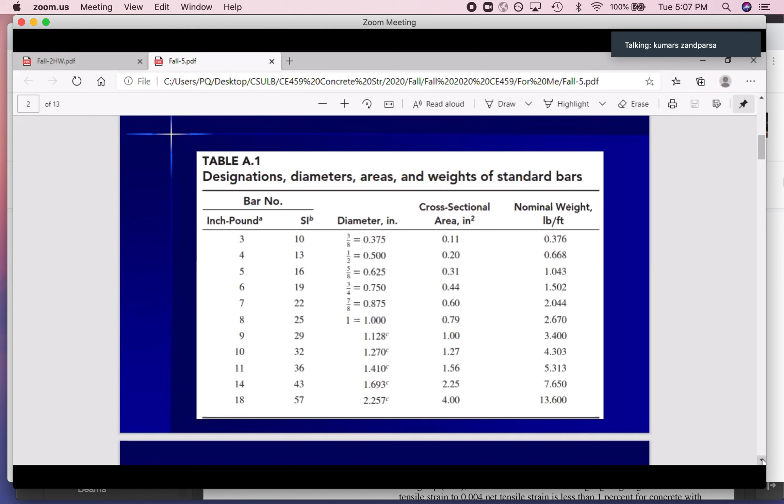Please do harder work. I know you are busy, you have a lot of other stuff, but this is the one you decided to actually work on, so please do it. I will help you.

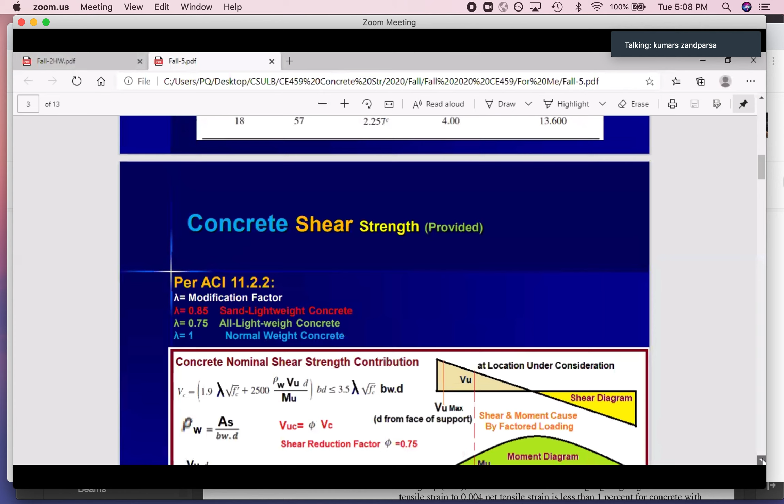I started last week on the shear, and today I'm going to complete this section, and hopefully you can see.

Yes, there is one question. What's the question? When did you say exam 1 will be? Should be next Tuesday. Okay.

Let me read another chat. Yes, these slides — no, I think... let me see. Looks like those are not on Beachboard, and I think you need them.

Let me double check, because I put them up, but if you can't see them, it means I didn't... no, yeah, it's not — number 5, it's not actually visible to you guys. So let me go and make that visible for you.

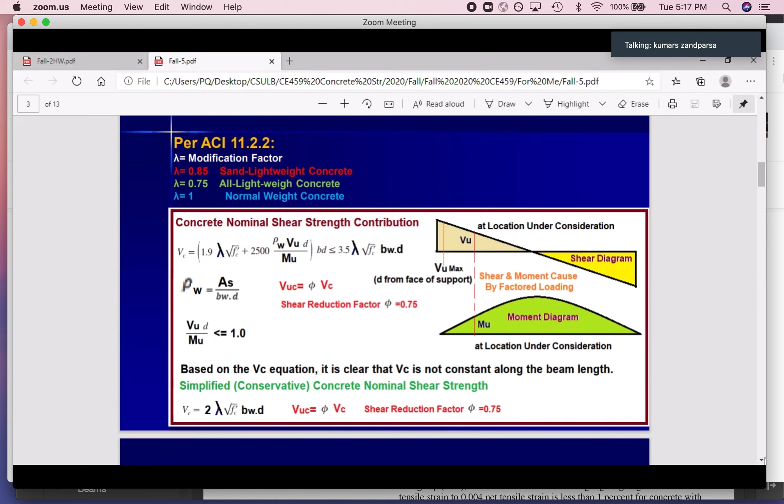But is that good enough? No, we have to do a lot of other stuff as well. Please follow me step by step, and whenever you have any question, stop me. If you have a question, let me know. Otherwise, how do I know that you still have a problem with the first slide? If you have problem with the first slide, raise your hand, text me in the chat, so I will go back and review.

So I have a question. Sure. Is VUC the rebar shear capacity? No, look at this. VUC - VC is for the concrete, nominal.

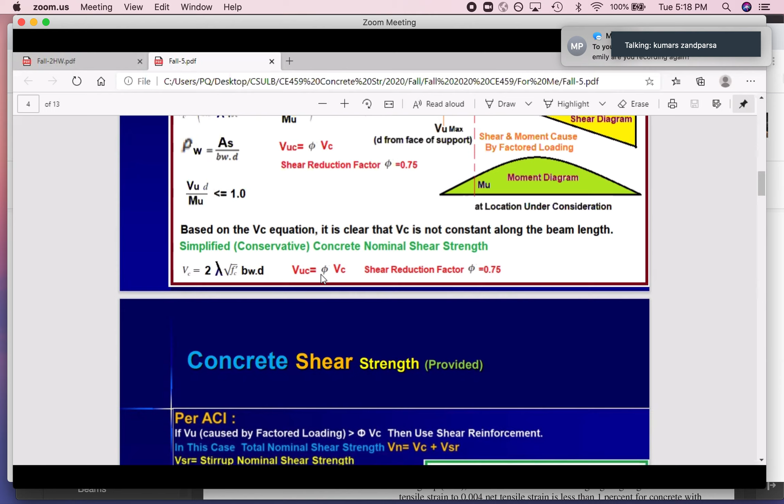Can you remember MN, like MN for a moment? We had MU, this is VU. MN was, MU was the ultimate moment capacity provided by the material. This is the ultimate shear capacity provided by concrete. So yeah, this one is just for concrete. C means concrete. Clear? Okay.

Let's go to this one. Per ACI, we should do something, and you can see always your VU, the shear caused by the factored loading. How can we calculate this? You will see in a lot of examples that I am solving here. So VU is coming from the loading.

VU must always be less than or even equal to phi VC - what was that? VC was the nominal shear capacity of concrete only. Phi VC is the ultimate shear capacity of concrete only. For sure, if VU is greater than that, it means that the concrete by itself cannot tolerate the load, because the shear from the loading is greater than the ultimate shear capacity provided by the concrete.

So what can we do? Then we have to add stirrups. Look at this, this is the beam. These are the stirrups, transferring the shear from here to here. S is the spacing, stirrup spacing.

Sometimes you can see it has two legs. Look at this beam, it has one here. What's the question? No question? Okay, so look at this other beam.

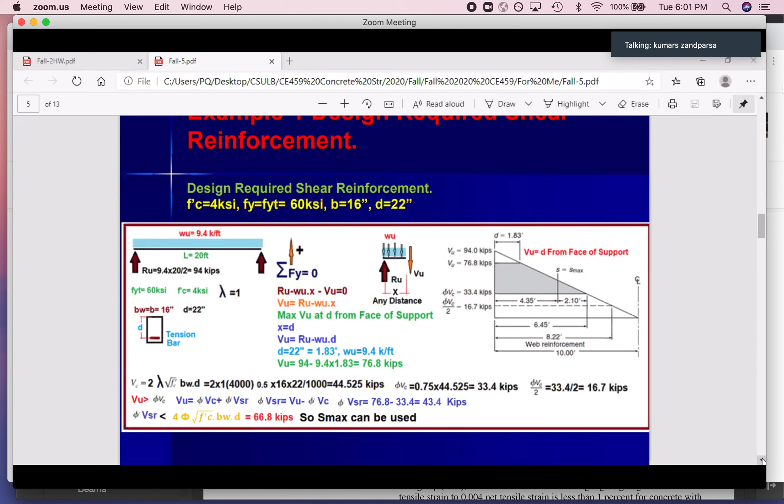Did we assume a phi? No, phi is always 0.75 for shear. So for shear, always 0.75. Phi is not a fixed number for moment, we have to calculate that, but for shear it's always 0.75. Okay, let's continue.

We are not done yet, we know all that stuff. I just showed that diagram one more time here. Just remember, D from face of support. This is our V, this is phi VC, phi VC divided by 2. We got that from the last page.

Then what else can we do? We remember, most of the time, we are going to use number 3 or number 4 stirrups. One more thing for your exam: I'm not going to give you something where you calculate it, and if it's wrong, you have to redo it, because I know that takes a long time. So for the exam that's not a good question. I'm giving you a question where I give you the cross section with the rebar.

I ask you to check if it's good to carry that load or not, so you are checking, not designing. In this case, we are designing. So number 3 is a good guess, and number 4 after that. More than that is too big for a regular beam, not good for bending at this corner. So we use number 3 stirrups with 2 legs. This is our assumption: 2 legs, as you can see for rectangular, the easiest part is 2 legs.

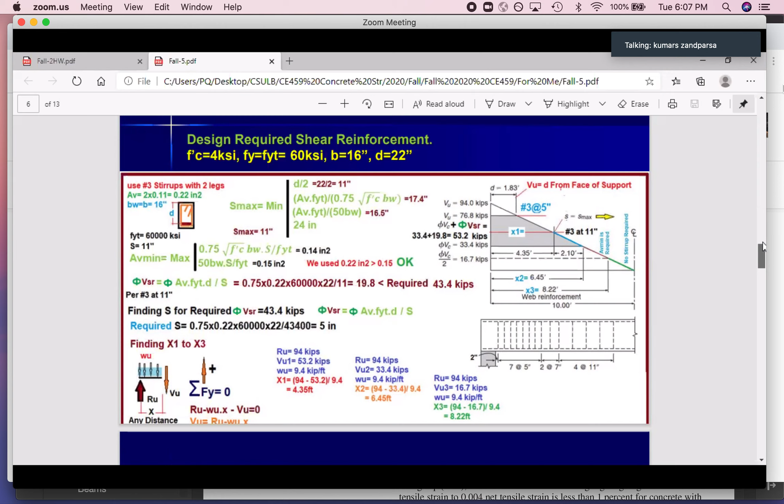And what is the required? The required is the difference between VU and VVC, that's the required. So how can I find the required? One more time, let me see if we calculated that on the other sheet. Yes, we calculated that.

Your VU was greater than VVC. How do we know? Look at this. VU is here, VVC concrete only is here, so it's greater than that. So I can write your VU equals the capacity.

The capacity means Vn times V is equal VVC plus VVSR. Or I can rewrite this based on VVSR is equal VU minus that one. So if I consider VU equal the VU that we have, the capacity for the stirrup must be 43.4. The difference between these two numbers, this number minus this number, means that this part must be captured with the stirrup. Based on the equation, this is the equation.

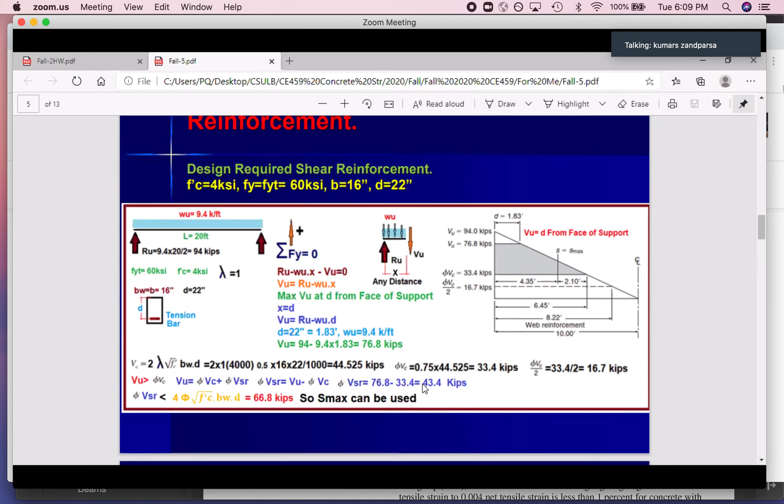Vn is equal Vc plus Vsr. Vn is equal Vc plus Vsr. And Vn is Vu ultimate, and I'm using ultimate coming from the loading to at least be able to get this one. Rewrite this equation based on VSR, calculate VSR, 43.4, okay? So I need 43.4 for this one.

And VSR is less than, this is a requirement, phi square root f prime c bw d, f prime c psi, it's less than this, so 66. You can see 43.4 is less than this. So S max can be used.

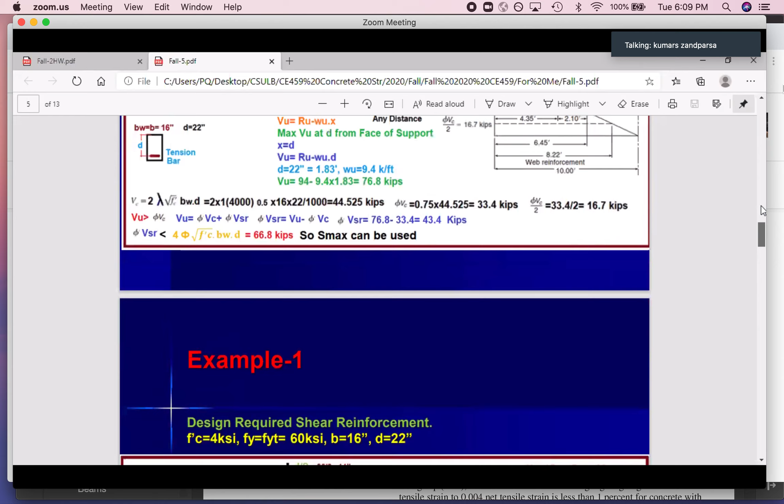Let me go back to the slide we have to see what we are using. I calculated VSR and we noticed that VSR is less than this. In this case, stirrup spacing not more than S max, so we can use S max. If we were in the other case, we should go with S max divided by 2, but we are in this case. So any step we take should be based on the code and result.

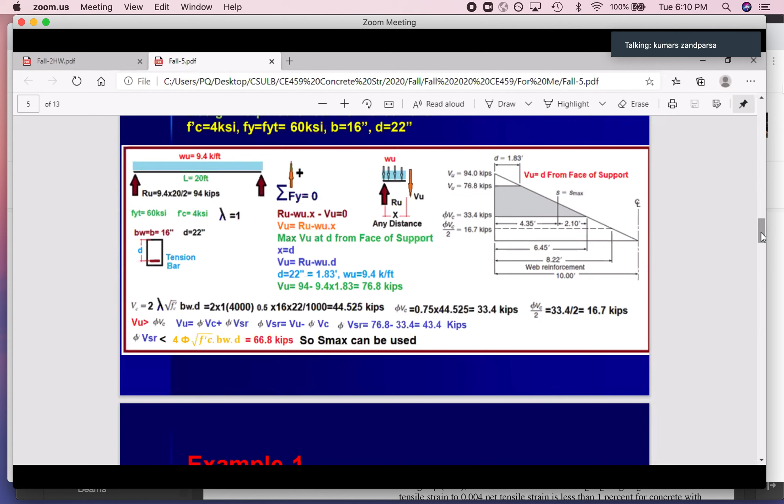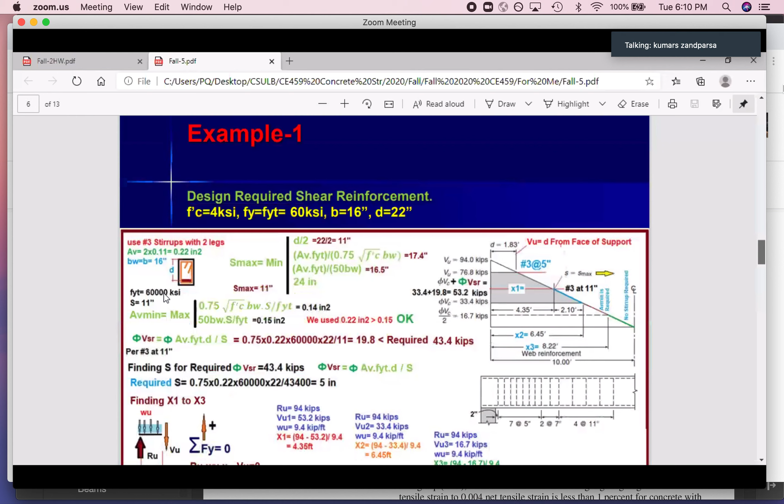What's the question? Did we use the check for AV min, the VVC over 2 is less than VU? Did we already do that? VVC is less than VU. For this example, did we already check to use AV min? So look at this, we calculated AV min based on the S max.

Do you have any question on this one? What's the difference between these two? Because they seem to use different steps. What do you mean different steps? This step and last slide? Like that last slide didn't have this AV min part, we didn't have to find that. So why do we have to find that?

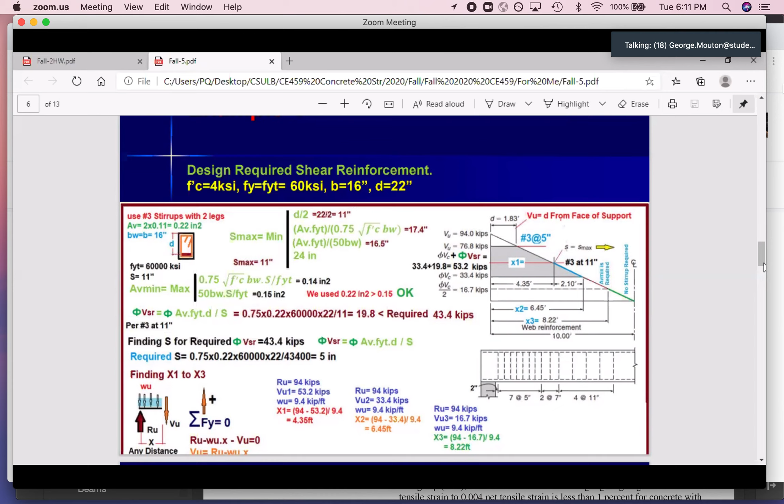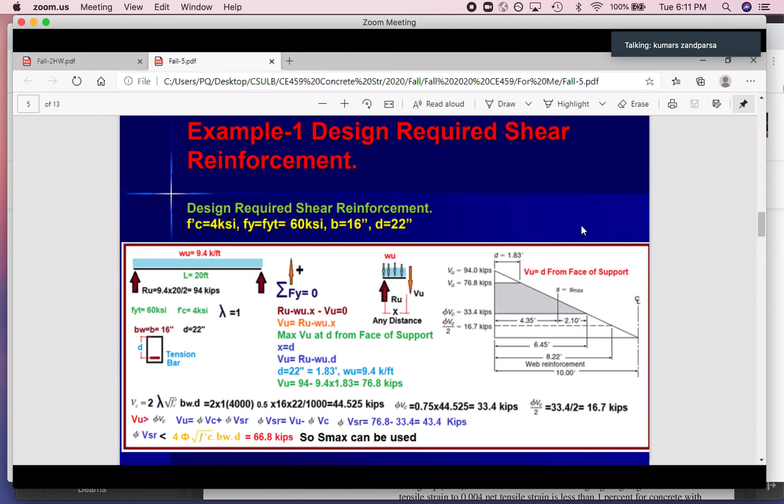No, look at this, look at this. Design required shear reinforcement, this is the example. So we have to go all the way to write the shear reinforcement for this beam, give them the spacing and everything. Yeah, that's the design for shear reinforcement.

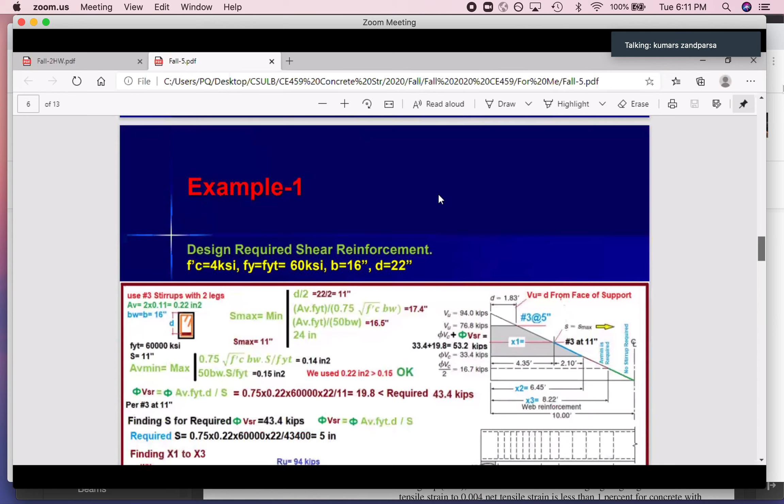So we have to start with this, and still we are following these steps for the same example. We are not done yet because we designed the required—we didn't design yet. Just we calculate the forces and we checked if we can use S max or not. That's it, we didn't find any stirrups and the spacing, required spacing. Just we understand we can use S max, but that doesn't mean S max is good enough for us. Did I give you the answer?

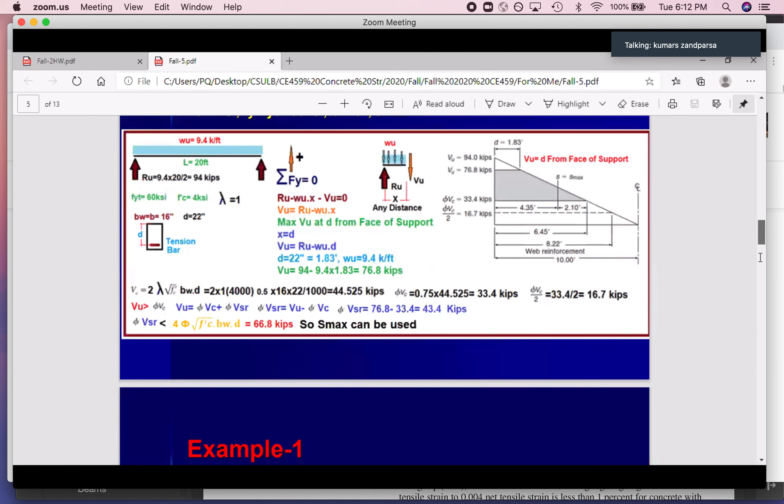Okay, so let's go after this, and hopefully at the end everything should be much clearer. Based on this one, we calculate the VSR based on AV that we use, and S equal S max.

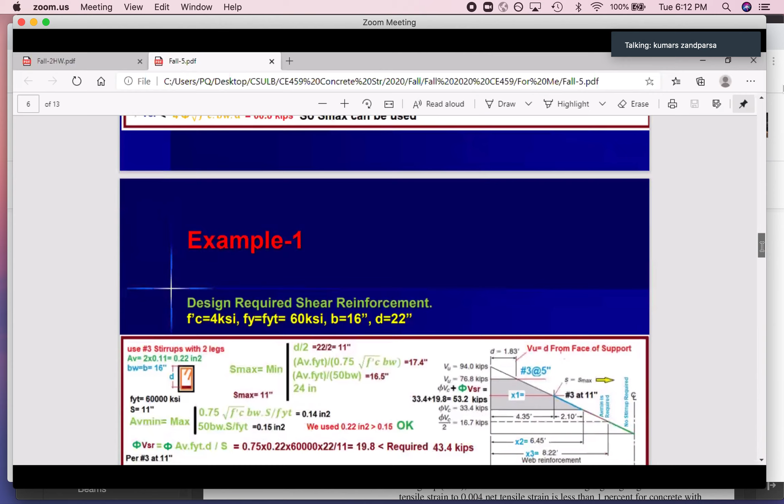As you can see, VSR, if we follow S max, we will get 19.8. But we need—look at it—we need 43.4 kips for VVSR. So using S max is not good for us. Per code it's acceptable that you can use it, but doesn't mean that when we can use it, it's good for our situation. We can use it, we use that, and we calculated VVSR, and only with that spacing we can capture 19.8 kips, but we required 43.4 kips.

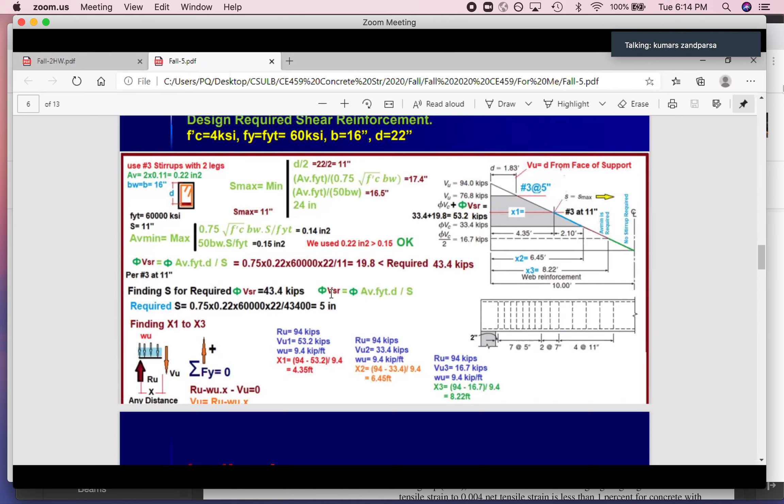But in this case, no, we can't use this. So what can we do? We still can use number 3 stirrups with 2 legs, but the S equal 11 is not good for us. We need a smaller S. How can we use this? Okay, we can rewrite this equation based on the S. I think I wrote that on that slide.

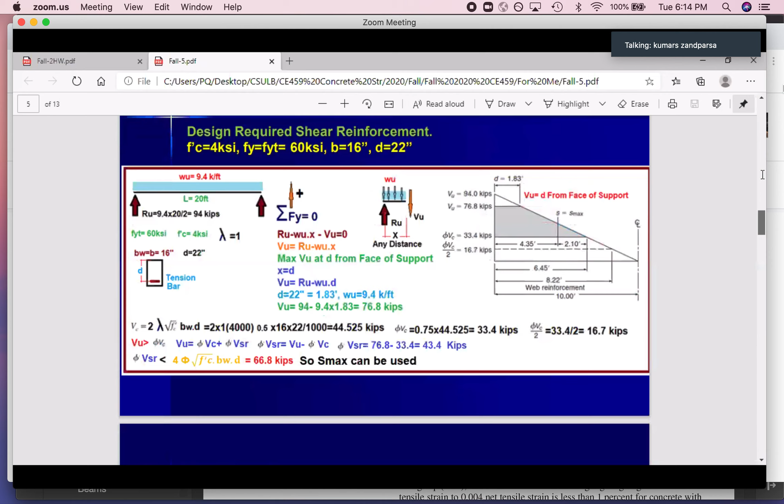I'm not sure if we did that or not. Let me see. That's your VVSR. Where is VVSR? Look at this. That's the equation. This equation, VSR, you can multiply it by VVSR.

So if you want, you can rewrite this equation based on S. S divided by AV FYT. S equal AV FYD divided by VSR will give us S. So you can rewrite this equation based on S. We use this part in order to calculate S.

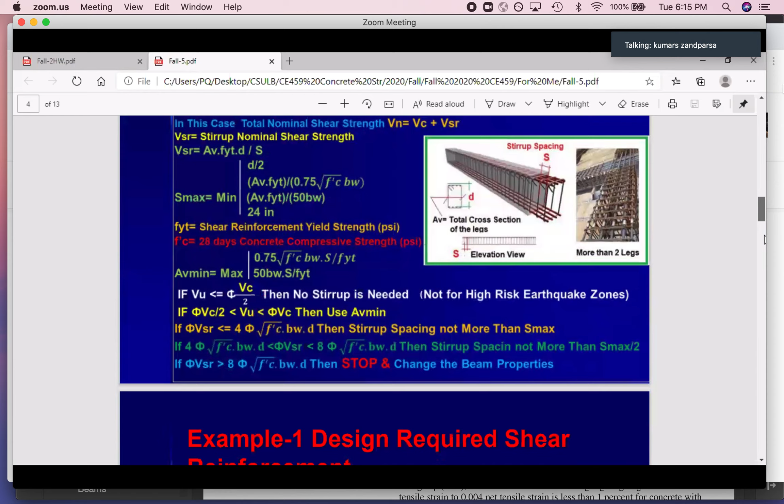Or if you don't want to consider that, just in the equation here, put VVSR 43.4 because we want to get 43.4, 0.75, AV 0.22, FYT 60,000, D 22 inches divided by S, and S is unknown. Then everything here is clear except S.

I wrote that here, 0.75 times AV times FYT times D divided by VVSR, because here is pound, so times 1,000, 43.4 times 1,000, 43,400. You can calculate that the required S is 5 inches.

So with that high number, we cannot go with 11. 11 is acceptable, we check that we can use, but it's not good for this case. We recalculate S based on the required VVSR, and we find that with 5 inch, we can get that number.

If we go with number 3 at 5 inch, so VVC plus VVSR is equal. This one, VVC plus VVSR is this number, and because of that, at this point we need number 3 at 5 inches. So if you go number 3 at 5 inches, you can go all the way.

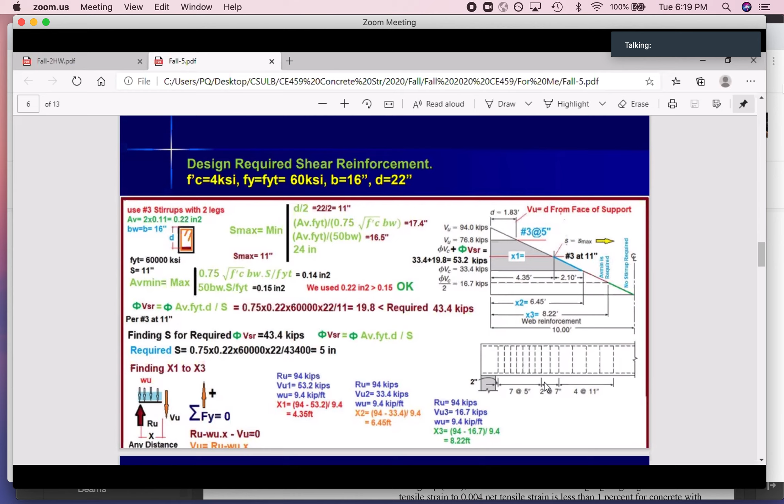In this case, I want to find the distances. I want to see at what distances I should stop number 3 at 5 and start number 3 at 11. I want to find this x1. The same graph that I showed you over there, you can use this here, to find this x1, x2, x3, whatever you want.

I wrote all of them here. For example, I want to find x1. For x1, the same equation, VU here. What is this VU here? This VU, I want to see at this point.

Look at this. What's the VU here? 53.2. I hope you can get this. If not, stop me, ask me, or in the Zoom meeting whenever you want, I can review this stuff to make sure you got this.

53.2, this number is your VU. Write the same equation: RU minus wu times x, negative, is equal to 0. So VU is RU negative wu times x. Then your VU, we know VU is 53.2, VU1, look at this, because this equation is for everyone. So if I'm using for x1, I'm using VU1, 53.2. So RU is 94, the same as the first, is your maximum.

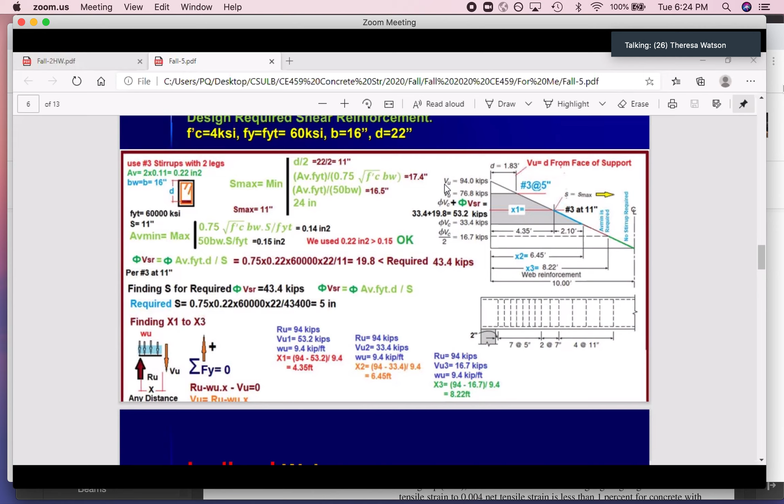Sort of. I guess I'm a little confused because in this example, here when we were doing this last part where we were finding X1, X2, X3, we used that maximum, 94. But then on the previous slide, at the bottom, when we were calculating phi VSR, we used 76.8, and I think I missed something.

I don't understand. Now look at this. Over here, we use RU 94 as well. RU is always RU, yeah, it's not changing. This equation is always based on RU, wu, X, and VU. That's it, all the parameters are the same, and RU is always 94. Is that clear?

Wait, so... Oh okay, wait, I think I got it. I think you thought about two different stuff, and because of that it was confusing.

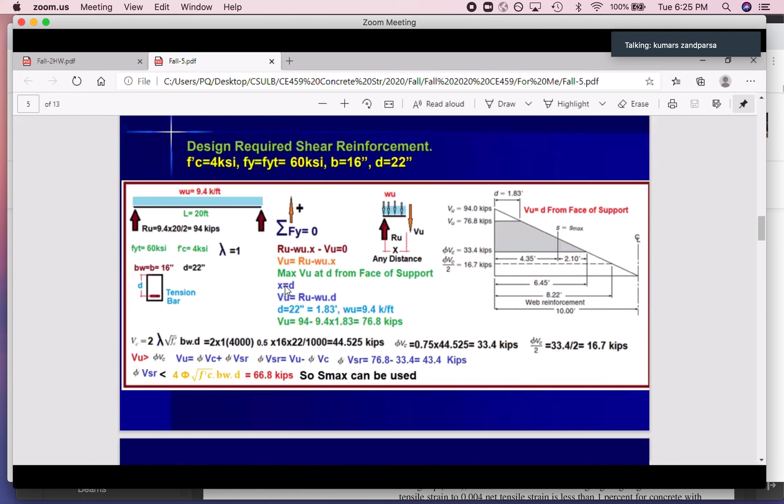But right now, we are talking about just this sketch to calculate X or VU. It depends on what we want. Over here, we know X, it's d from face of support, so your X is clear. We know X is equal to D, so you can calculate VU. In other cases, X1, X2, and other stuff, we know VU, and then we calculate X. So you can use this for any cases that you want.

Okay, I see what I was confusing. Yeah, thank you. Okay, perfect. Very good. And then how did you go about any question, finding the VU1, VU2, VU3s?

So VU1, VU2, VU3 are just at the location where we have phi Vc divided by 2. Can you remember, whenever you have shear less than phi Vc divided by 2, based on the code, there is no need for shear reinforcement. Because of that, look at this, I put this note: no stirrups required from here to here. Why? Because shear is less than phi Vc divided by 2. But as I mentioned, this is not for the earthquake zone. For California, always use the minimum.

Go number 3 at 11 inches for the whole section, there is no need. But based on the code, if you are working at some place where earthquake is not important, from here to here, no stirrups required. From here to here, AV min is required. Look at this, I put everything based on the code.

So from here to here, AV min is required. So AV min, if you go with S max, you go with number 3 at 11 inches, you have more than AV min. And because of that, number 3 at 11. So please pay attention to these notes. I tried my best to put everything on the slides so it can make it clear.

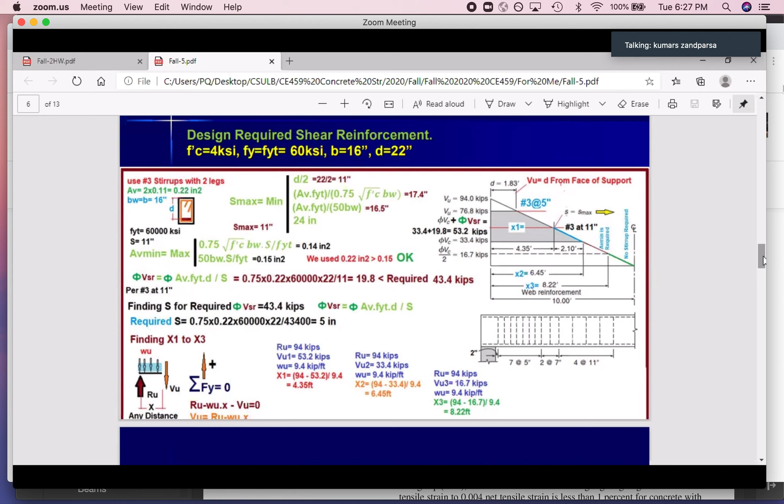As I mentioned in class, I can talk about this stuff to you, I can show that. But over here, if I miss something, it's hard for you to read this from the book. So I hope everything is clear, but you need to study more and then ask questions. And this is another case.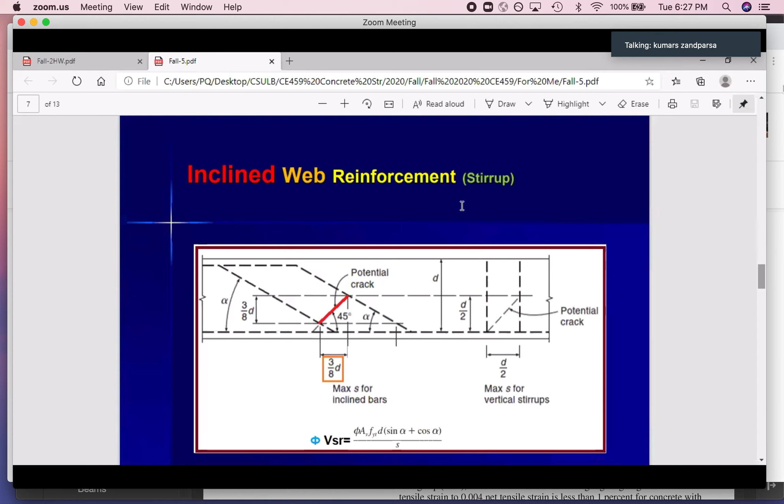On the diagram, after 8.2 feet, we don't need steel. That's correct, but not in an earthquake zone. Okay, so look at here.

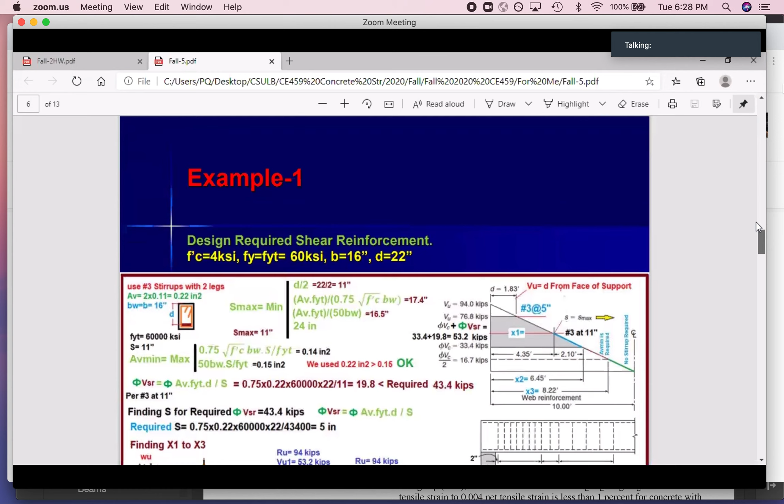Let's look at this. I showed something, look at this.

If VU is less than or equal to phi VC divided by 2, then no stirrup is required. If VU is between phi VC divided by 2 and phi VC, AV min is required. I wrote them here. Look at this: less than VBC divided by 2, no min; between phi VC divided by 2 and phi VC, AV min. Is that clear? Yes.

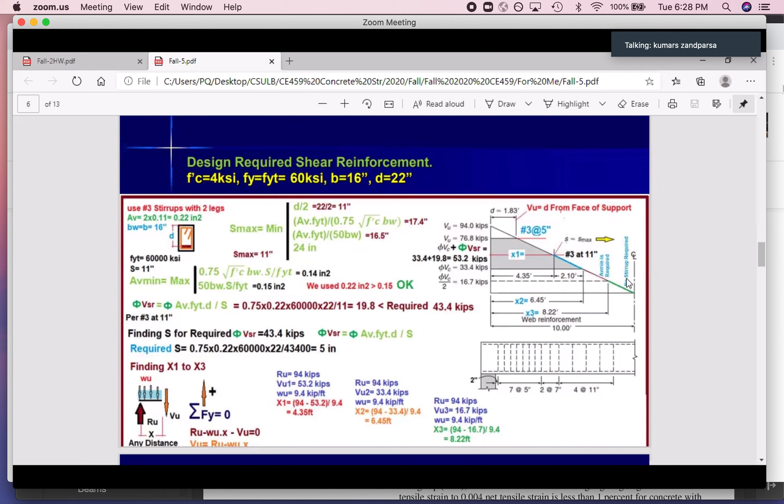Perfect, very good. And that final S we found, is that going to be the final S for the spacing? That's good, this is the final. You need number 3 at 5 inches for this length, up to this length. Or you can go less than this and 2 more at 7.

I didn't do this one, but if you want, you can actually split this into 2 parts. It's not that critical to do this. From here, you can go with number 3 at 11 all the way for the rest of the beam, because this is based on the AV min, S max, almost AV min. So we need this all the way for the length, and the other side of the beam should be the same as this side.

How did we decide 5 inches spacing? Now we calculated, look at this, we find S based on the equation that we have here for phi VSR, we put 43, so we calculated S.

So let me answer one chat for the chat. A little off topic, sorry, but will the test have material up to this lecture? That's correct, yes, up to this lecture for the test.

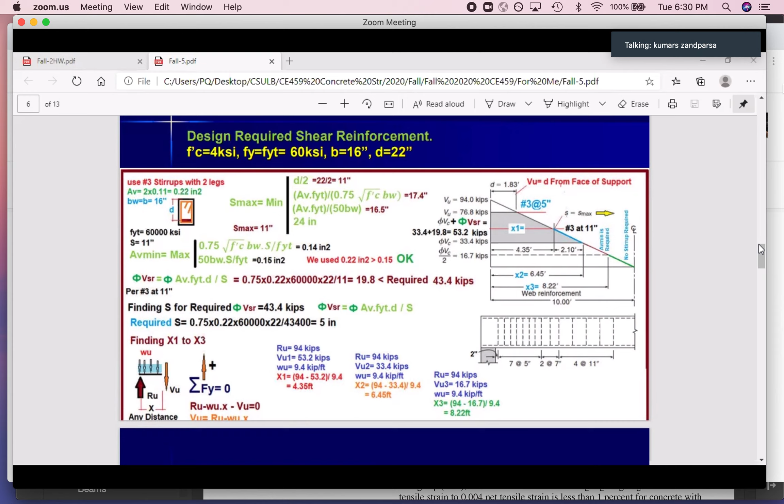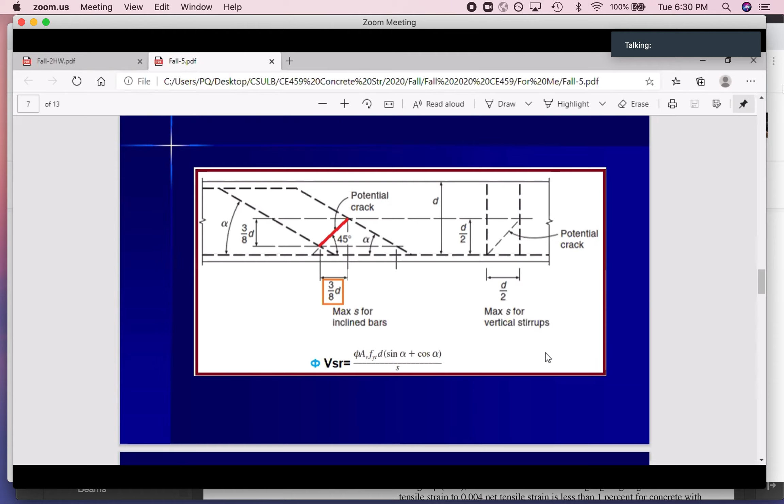Okay, another stroke, if you go with this, I just put that here for you guys. If you have a case like this in real design, follow this instruction for phi VSR. Everything is the same, just for phi VSR you have to use this equation, based on alpha equal to whatever degree you are going with, 45 degrees whatever. So that's the equation. This is just for your information. This is your homework.

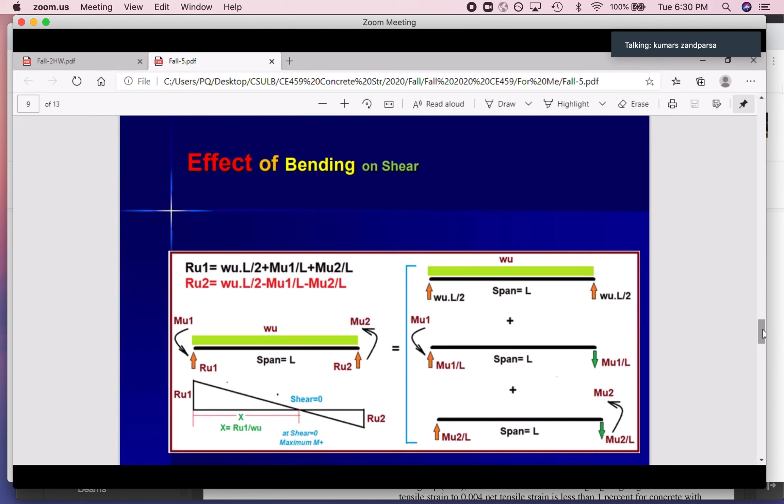One thing that is going to be important, I'm going to refresh your memory. You should know this. I'm just refreshing your memory, and it's important for the exam as well. Just informing you, please pay attention to this, okay?

Imagine it's not a simply supported beam, it's part of a continuous beam, or part of a frame. So you have negative moment, any moment at any direction. Look at this, I use different direction moments because I want you to learn everything based on one slide.

So how can I find the shear diagram? Because you need that shear diagram and that X, and then you can go with different faces of the support and other stuff to show on this. So you need this reaction, and you can see they are not equal in this case. It's not simply supported, you have moment.

So in this case, always make it easy. Right now I'm teaching you statics, very simplified statics. I'm going to make that as simple as possible. In order to find RU1 and RU2, at first I will consider this as a simply supported beam. Look at this, there is no moment. Please follow this instruction.

This one is equal to this plus this plus this, that's it. Okay, simply supported, omega U, omega UL over 2, omega UL over 2. So reaction is easy to find. Then I will consider just this moment.

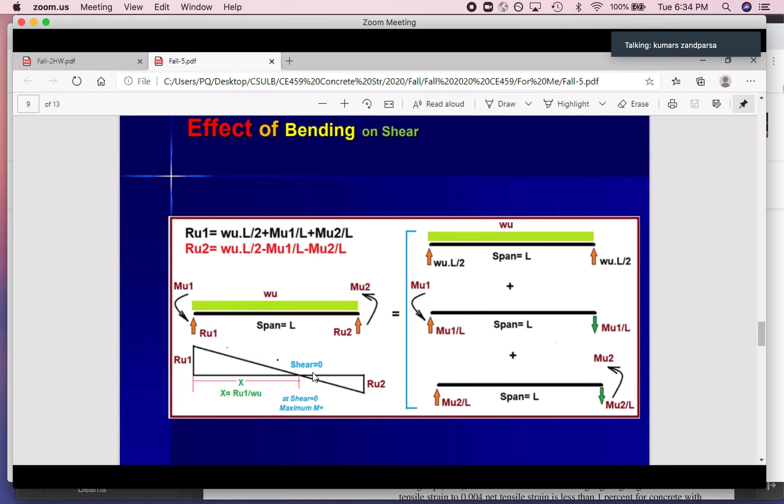I hope I gave you the answer. And how can you find X? RU1 divided by omega U, that's the length. So, and you can find the maximum moment. That's not the case for this. So this is just for the shear diagram.

An example unit: imagine we have 20 feet, omega u 2 kips, I showed the direction, and over here I changed the direction to practice this again. So 40 foot kip that direction, 30 foot kip this direction. Okay, so split this to 3. 2 kip per foot, 20 feet. 2 times 20 divided by 2, yeah, that's the equation. You will get 20 kips upward, 20 kips upward. Simply supported, this one is simple.

Then moment at one direction. So this direction 40, upward this side, downward the other side. So moment, foot kip divided by length. 40 foot kip divided by 20 means 2 kips. Okay, the other side, 2 kips downward. This one, I changed this direction. So upward this direction, downward that direction. M2 divided by length, yeah, 1.5, 1.5.

RU1, I can find RU1. 20 plus 2 minus 1.5. 20, 2 minus. RU2, 20 minus 2 plus 1.5. 19.5, so 19.5 here, 20.5 there. Then X is equal to this reaction divided by omega, that's the length that you have shear equals 0.

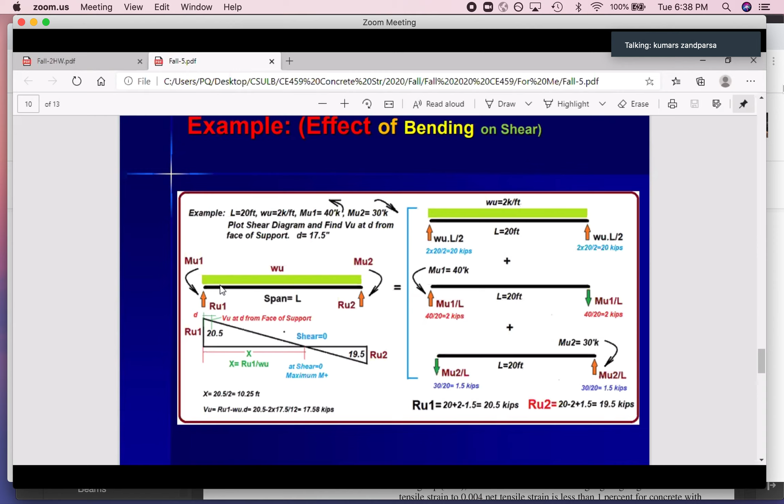So this covers the situation of having a moment on both sides when you have a load on it. That's correct. This one will cover everything, with loading and moment, with no loading and moment, with loading with no moment. Yeah, so this one will cover everything.

Professor, is it only for a simple support beam? No. This one is for continuous beam or for the frame because you have moment. Simple support has no moment. This case is for frame.

So it's not simply supported anymore. You have moment at both sides, like this. Any direction I show, from that side or this side, just follow this instruction for upward or downward load. So this case is for frame or for continuous beam.

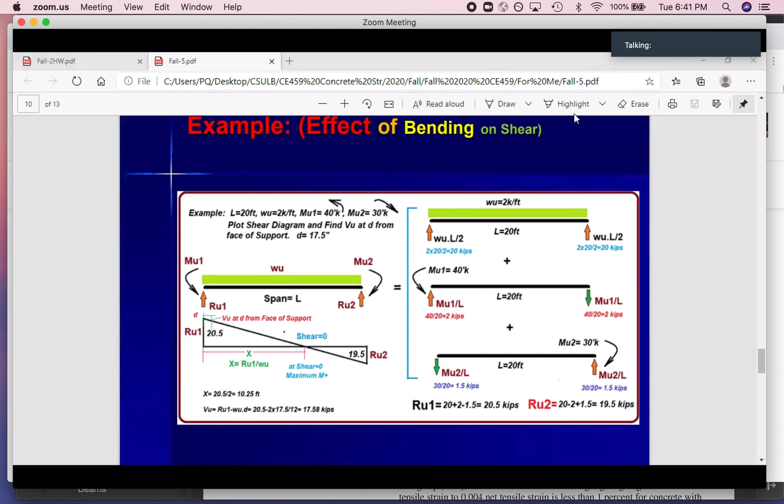Thank you. Is that clear for everybody? Yes. Okay, perfect. I like this class.

You are great. You actually ask a lot of questions, with email and during the class. Sometimes I have to actually go back to different slides. I like that, it's not bothering me when you ask questions. When you ask a question, it means that you are listening, and that's good. I like to see I can make contact with you even if I can't actually see your face. You can see my face, but we are following each other. You can see some pictures, I can see some pictures, but we can get to something the same, and that's the goal that I want to see.

So that's for today, and we are done with actually 2 chapters for exam 1.

And one question. Yes, what's the question? It's actually about the test. I was just wondering what kind of format it's going to be in, and how many questions, and how long we have to take it.

Okay, that's actually a good question. I'm giving you guys, please just listen to me. Don't panic. I'm not going to give you a problem long where you have to make a decision on how many rebar you should pick, and then it's not acceptable, then you have to pick again. No, I know that it will take time, especially for students that just started.

We're going to be sending you the test answers through email, correct? Not Beachboard? That's correct, that's correct. You will send that by email to me as soon as you are done. I will give you 1 minute left, and then please send that over.

So take a picture from your handwriting, and then send that to me. And the time that I'm receiving, that is the time that I'm checking, because I put a note on my exam of what time it started, when it should be done, plus 1 minute. Then I have to receive all the answers. Then I will give you the second one.

So you have no extra time. If you spend more time on the first one, you will lose time for the second one. The questions are easy enough that most students can send that even earlier than the time I gave you guys. Believe me, don't panic.

Just read this stuff. Solve all the examples by yourself. Believe me, solve all the examples by yourself. I'm giving you the solution for the homework. I accept that I am doing this, but it's not helping you that much compared to the examples. Other question?